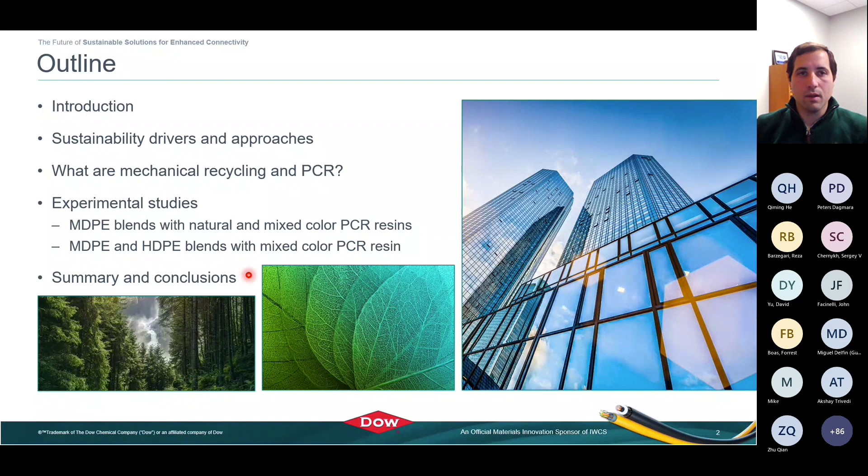So one of the biggest drivers right now, for those based in North America or following the North America market, is a lot of the investment with respect to the infrastructure bill that was passed in 2021, where greater than $500 billion are going to go into the infrastructure improvement program. And a lot of that has to do with the wire and cable industry. So over about $65 billion just with respect to broadband. So a huge investment, and with that comes huge opportunity, right?

As we look at this huge investment, how can we support the industry to be able to deploy all of this cable, but also think about where we're headed in the future and make sure that we're doing it as sustainably as we can, with as low a carbon footprint as we can, and doing our part as an industry.

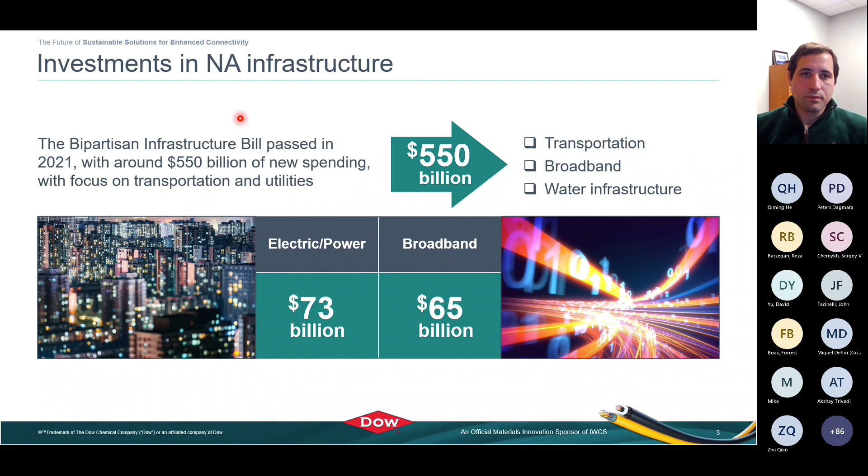So as I said, this sustainability is really going to impact all of us across industry. We'll talk about wire and cable today, but you see the majority of this in the packaging space or the consumer space, where sustainability's really been pushed from single-use packaging types of applications. We've all seen things around plastic waste, and so those are really the drivers for it.

But again, we all kind of have a part in this as we look into the more durable goods. So things like cable, where they are really meant to be long-lasting, highly efficient, and they are sustainable in that way. But how can we also take it a step further? And that's what we'll talk about as we go through the presentation on other concepts that we can look at to further improve that.

And whether it's the North American CHIPS Act, the climate bill, the combination for things made in America preferred in some applications, there is this strong demand for driving the infrastructure improvements, but doing it in a sustainable way, where these solutions are not only long-term, but also from the start, taking that all into account.

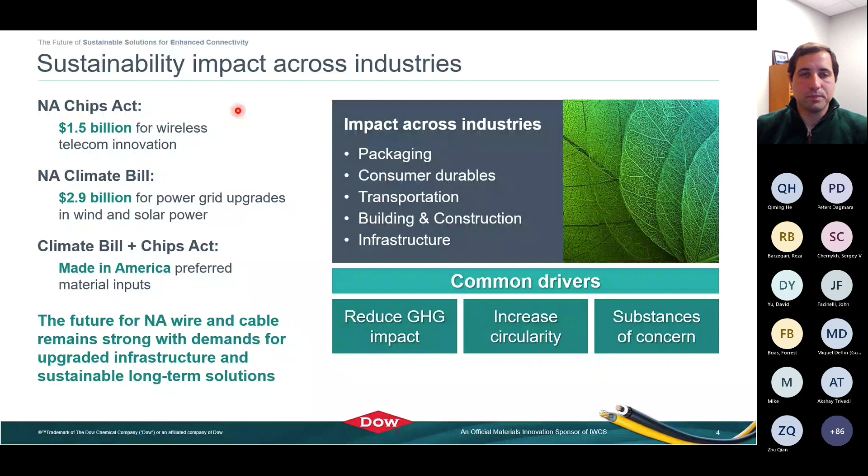So when we hear sustainability, I think it is a broad term, and there are many ways that a company, a person even, can approach being more sustainable in what they do. This is just a high-level look at how we're looking at it, and some of the buckets that we're focused on across our portfolio, with things like safer materials. So you can include maybe halogen-free types of applications for flame retardants, as well as other types of materials. But really looking at the safe aspect of the material as far as substances of concern, and there's a lot of things that can go into that bucket.

I think overall we're all looking for reductions in carbon emissions. I think that is a major driver. And there's, again, a whole host of things that can fall into that bucket, which we won't go through today, as well as renewable feedstock. So renewable, bio-based activity in the polymer world is out there, as well as advanced recycling, taking end-of-life plastic and turning it back into the building blocks. We won't talk about those either.

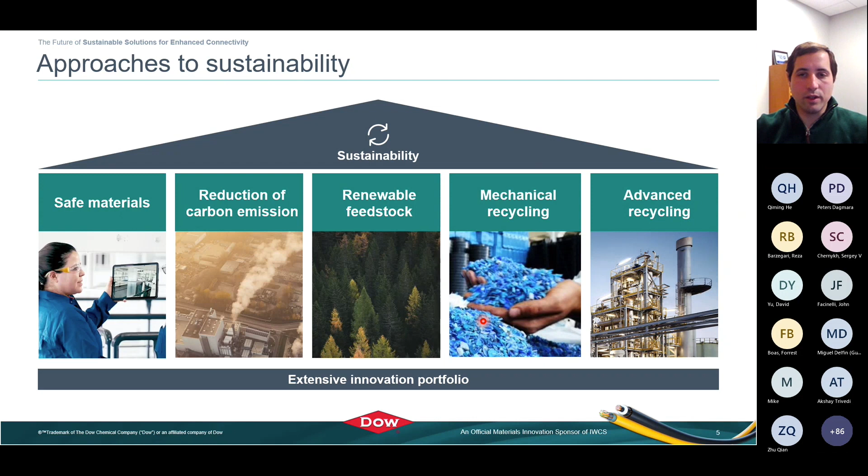I think what we're going to focus on today is this mechanical recycling. You'll see this a lot in consumer and packaging applications today. Things like your water bottle, a single-use water bottle, or reusable water bottle, I should say. That's where we're really going to focus our conversation, and how can we look at incorporating that, whether it be recycled polyethylenes from other uses, or even potentially bringing back around any cable material.

So for anybody that's not familiar or hasn't heard the terms before, what is mechanical recycling? What is PCR, or post-consumer recycled plastic? Used plastics will be collected and sorted, and then moved into another process where the waste is processed to produce basically a secondary raw material, or post-consumer recycled resin. So it can be anything from taking the material, grinding it, and ending up with some flake material, or you can often find various sources where some of it is actually a pelletized material that's a little bit easier to use. But then ultimately these resins are used to produce new goods.

So again, whether it's in the packaging space for shrink wrap on water bottles, or what we'll talk about today, which is really the cables, and in particular, just focusing in on the jacket as a proof of concept on where we could take it. But there are other applications within the cable world, obviously, that we could also look at. But it's really advancing the circularity of this plastic and giving it another life in use. So trying to promote the circularity.

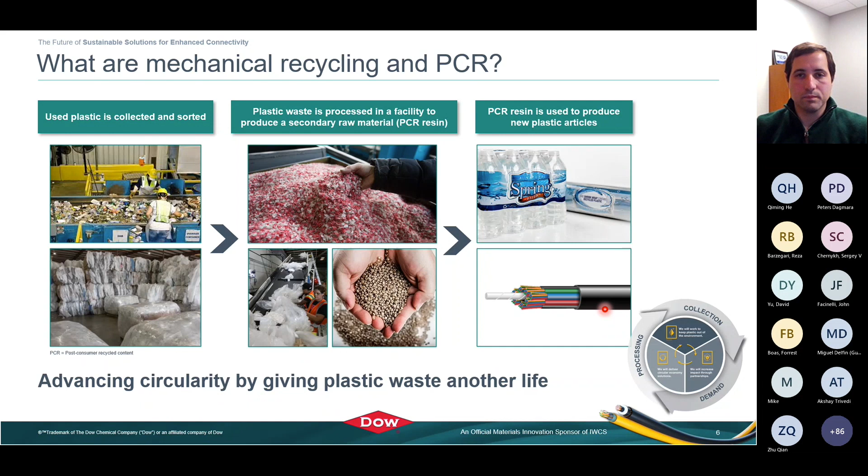So what are some of the options for mechanical recycling in wire and cable? Well, we can formulate with it, right? We can include it into compounds such as jacketing. In this case, going into more of an industrial space, we could look at post-consumer recycled materials, but also PIR, post-industrial recycled content. So there's various sources that we can look at and try to utilize in the most efficient way possible, while keeping the full supply chain and carbon footprint in view.

And then we can look at this for other applications, right? As I said, jacketing is one, but there could be other portions of the cable, or other parts of the cable supply chain where we could look at it and really utilize the full breadth of a polymer toolbox. So what we're going to talk about today is a few case studies where we looked at incorporating these different types of resins into the jacket. But I list a few other applications, particularly from a communication standpoint, but by no means is it limited.

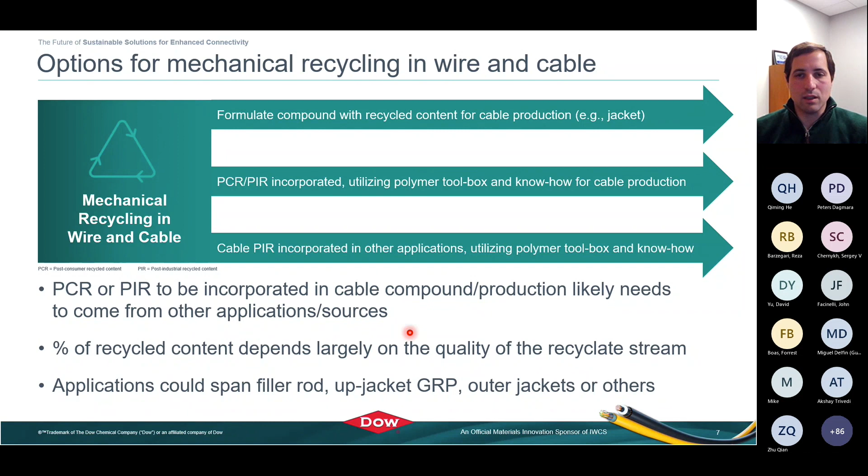Okay, so moving into what we did and how we looked at this from a high-level approach. We basically started with some virgin polymer, traditional material that you would use in applications today. So we have a medium density based polymer and a high density based polymer, with the basic properties listed. But then we took a natural high density PCR resin, which was more or less in the form of pellets, as I mentioned before.

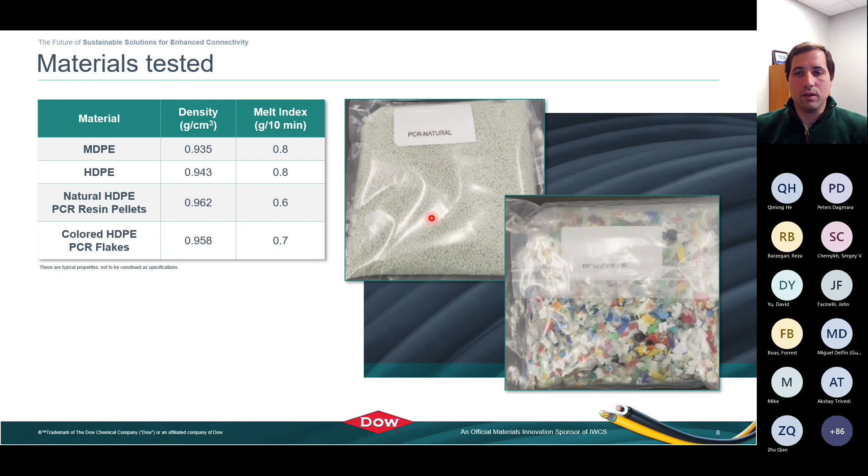But then also, what you might consider the worst case scenario as far as quality of PCR, where it's colored high density based flakes, right? So you can see the form, how random it is, the types of material that's in there, and colors. In some applications that won't be very useful, but here we're taking it into an application where it's black. So we did include that as a worst case, and then a more pure type natural. So we covered our breadth there.

What we looked at were selected properties for jacket compounds, to get a feel for how these materials would work and what baseline information we could generate in jacket compounds. So we took the resin, the other components, and the PCR, and incorporated them into one single jacket compound, looking at things like density, melt index, tensile strength, and elongation. These are some of the targeted properties and specifications that we would look to meet. But we did do some other testing, which I'll show, more of the longer environmental type tests.

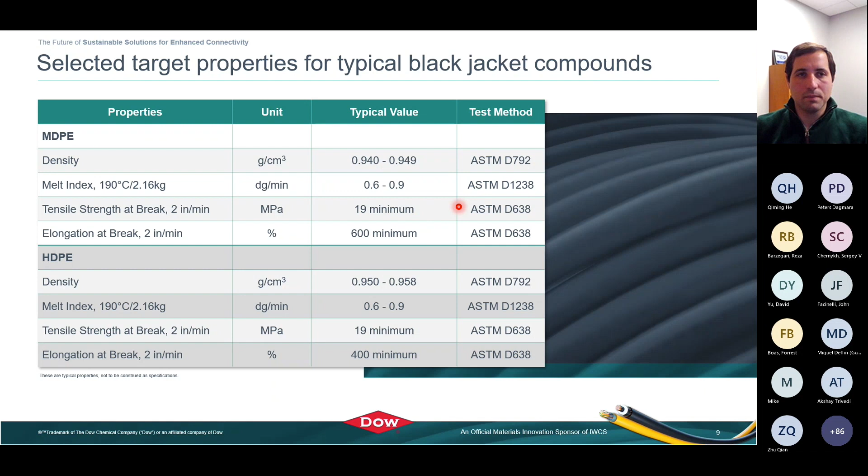So the first case study we'll look at, we started with a medium density base, from the standpoint of a lot of the applications today in North America anyway. And we looked at the medium density type jacket with both the natural and the mixed colored PCR resins. So we have a control medium density jacket where there's no PCR in it, and you can see the melt index and density there. And then we looked at the medium density base polymer plus natural or colored PCR, varying the PCR weight percent from 10 to 100, which would be all PCR, but formulated into the jacket compound.

And what you can see is the range of the melt index, as dictated a little bit by how much PCR was there, as well as the density. So there is some fluctuation in those properties, and really it's driven by the amount and the type of PCR. Again, looking at this as a worst case scenario, in that the PCR was high density and somewhat not controlled. So though the densities are a bit higher, we were paring this down with a medium density base in this case.

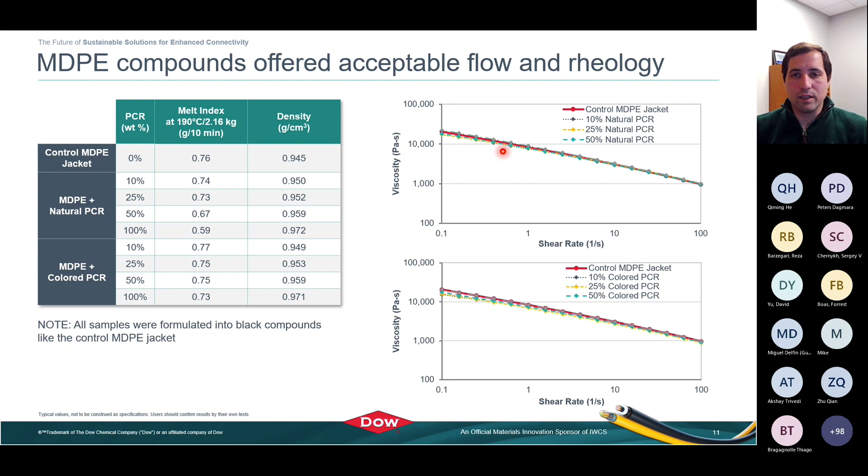If you look to the right-hand side, what this shows is you actually have very good processability across the materials. So we've got the control all the way up to 100% in here. It's just cut off on the legend, but you can see very similar viscosity versus shear rate curves in a parallel plate type rheometer. So from the standpoint of flow and processability, the materials behaved well and very similar to the controls, as we would expect.

The mechanical properties are really where you start to see some of the different deviations when you talk about the PCR materials and the randomness of the type of material that you get. So you can see the control to the left-hand side with very good tensile and elongation properties. But as you go higher and higher in PCR content, the biggest drop is really in the 50 to 100% on the natural PCR, but definitely at the 100%.

So, definitely see up to 50% is fairly good. 25 to 50 could work, if optimized. But then where you look at the colored, again, when we consider worst case based on how different the sources could be, you see the drop off pretty dramatically, particularly in the 100% itself.

So again, but with good performance up to about the 25%, which is, in many cases where you might see PCR even in other applications, that loading is considered acceptable and useful from a sustainability point of view.

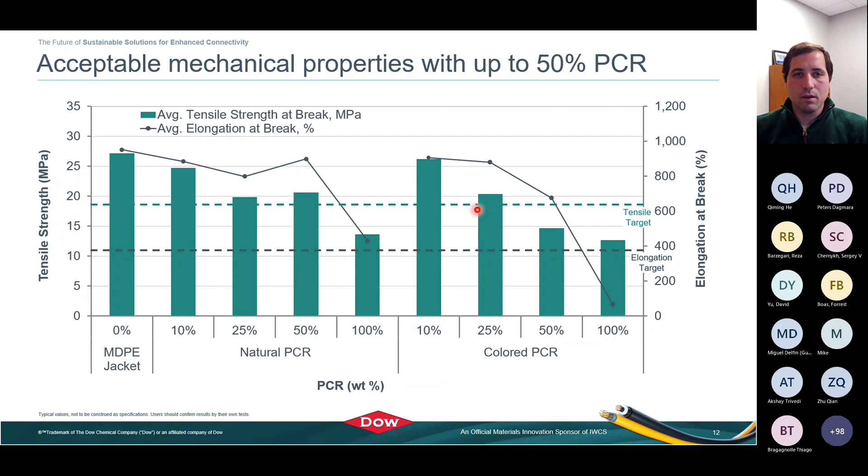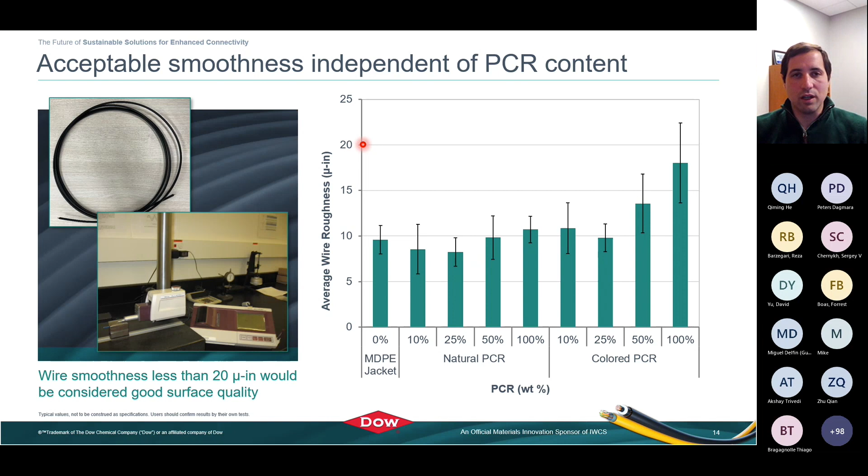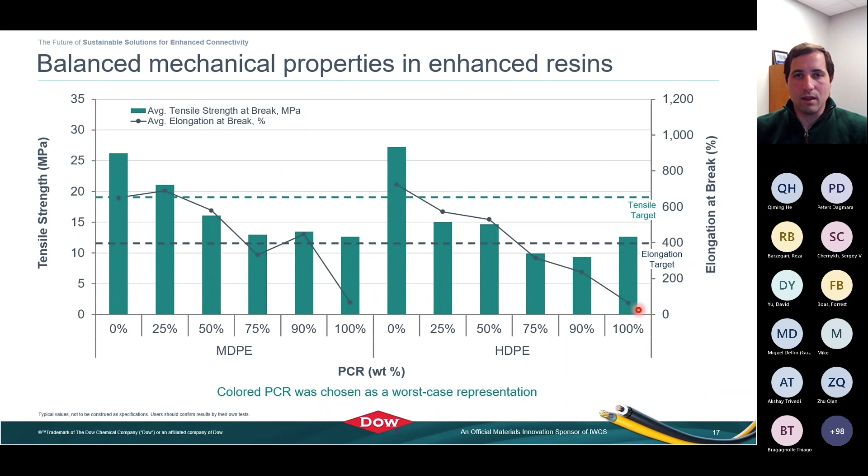Similarly with ESCR, again, depending on the applications or targets that you would have, there is a range of performance you can get, but really I would say in that 25 to 50% range. With these higher performance resins, you can have relatively good stress crack resistance, as you can see upwards of

1,000 hours or more with 25% in high density, which tends to have a bit lower ESCR depending on the material. Medium density is even over 2,000 hours in this case with the higher performance starting resins, where 50% loading gets you that 2,000, and even lower you can still reach the 4,000 hours.

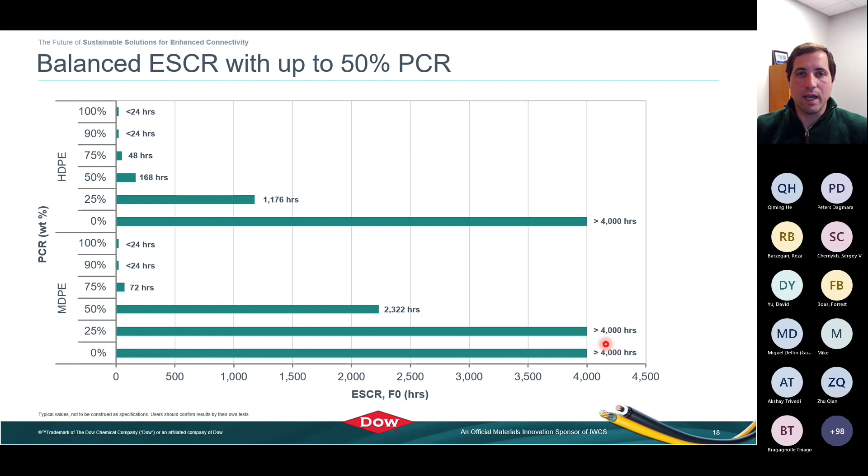And lastly, similarly, we have the smoothness. So we looked again at the extrusion performance and the final wire or cable surface smoothness, again looking for less than about 20. In this case, all of them were very good as far as being able to produce a cable with a smooth surface at typical polyethylene jacket processing conditions. Nothing special about how the materials were processed. Basically, a drop into a standard processing condition and setup.

So with that, hopefully we left you with the notion that sustainability is a significant market driver, and not just in North America, but globally. There are increasing pressures to be more sustainable across industries, not just wire and cable, and it's not just a packaging challenge. It's an industry and a global challenge that we all can look at different ways to promote and produce

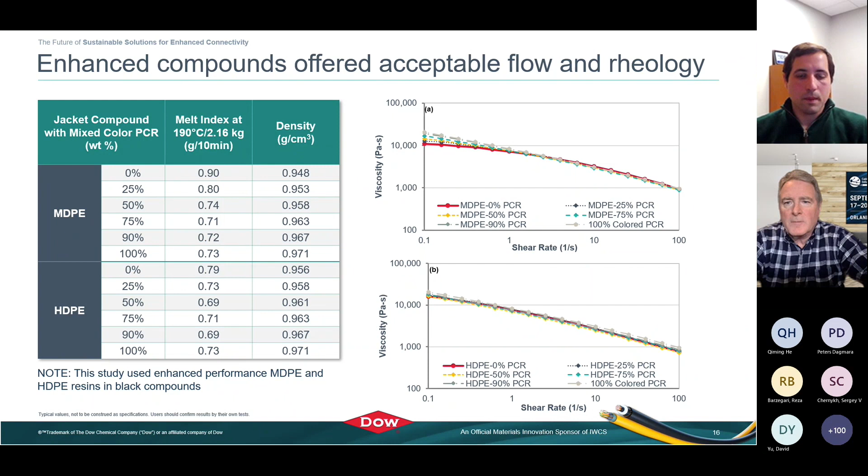What is the key chain structure difference between medium density and high density? Is medium density close to low density? So yeah, I can certainly provide more offline, but in short, low density, medium density, high density. Really, the difference in the structure is going to be the amount of branching that you see in the polyethylene backbone or off the polyethylene backbone. With low density having much more branching, high density having much less, which really drives how crystalline the material will be.

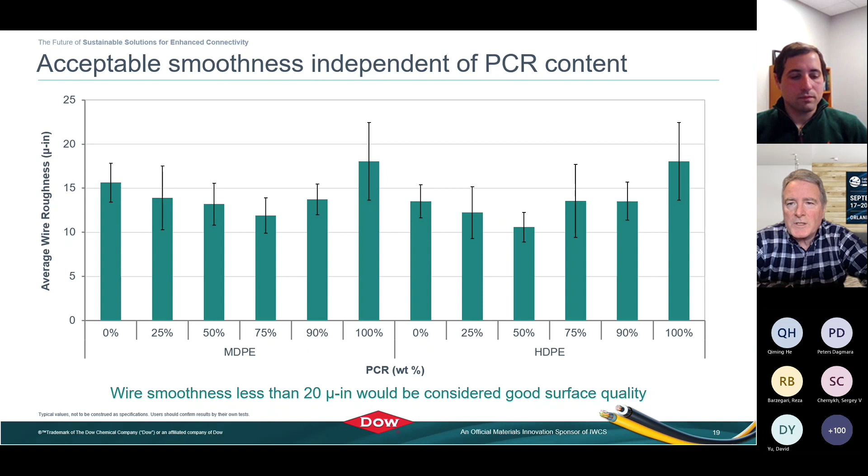Okay. Two more questions. Which are the base characteristics that you might suggest to control recycled mechanical polyethylene before blending with virgin grade? I mean, is there a characteristic that you might measure and then address the amount? I think, in a similar fashion, things that we see are typical polymer properties, something like a melt index, a density. You're gonna get those numbers from, let's say, a supplier of PCR.

And maybe there's some other ones that you could look at, but you're kind of treating it as a polymer. It's just you kind of know that it's from various sources. So I think that's the main thing that we've seen. There's probably others. I don't know all of them off the top of my head, though.

Right. And one last question. The long-term aging properties, how might they compare against the virgin materials? Yeah, so I think that's something else that would need to be considered. In this case, for us, these are restabilized, right? So we would add stabilizers just as we would for traditional materials. So the design on these would be that they would be just as good. You're just starting with different materials, but they'd be stabilized such that they can meet the long-term performance that would be expected.